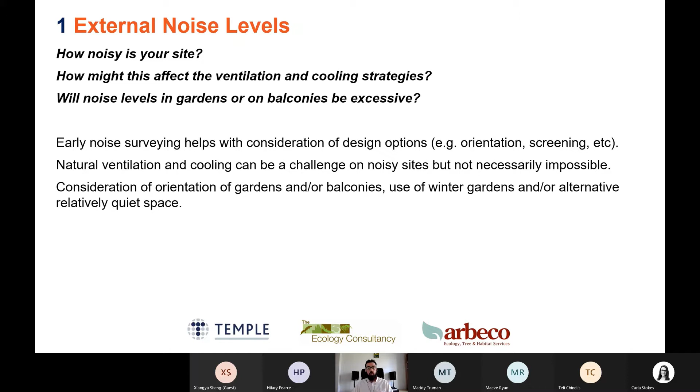On particularly noisy sites, we might look at things like winter gardens on apartments, or an alternative is to find an alternative relatively quiet space. So if we can't achieve the types of noise levels that we'd like to achieve in external amenity space, we could look at a quiet area on the site somewhere else, or a relatively quiet park nearby might be another option.

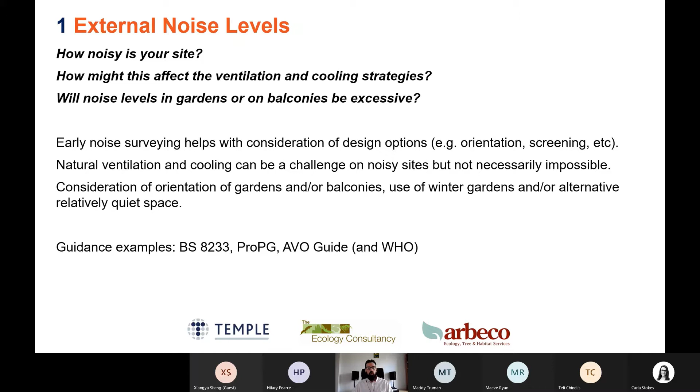So just some guidance examples. BS 8233 gives noise criteria for internal noise levels for things like bedrooms and living rooms, and also gives some guidance on the types of noise levels that we should be expecting in external amenity spaces. ProPG and the AVO guide, which is the acoustics, ventilation and overheating guide, gives some really good advice on those things as well. And a lot of that sort of background information comes from the World Health Organization documents.

So just a quick case study. This was Lefevre Walk, which I worked on back in 2004. So if you can see, this is the A12. Hopefully you can see my cursor there. This is the Lefevre Walk development here. And because this was so noisy, this barrier block was built along the length of the development.

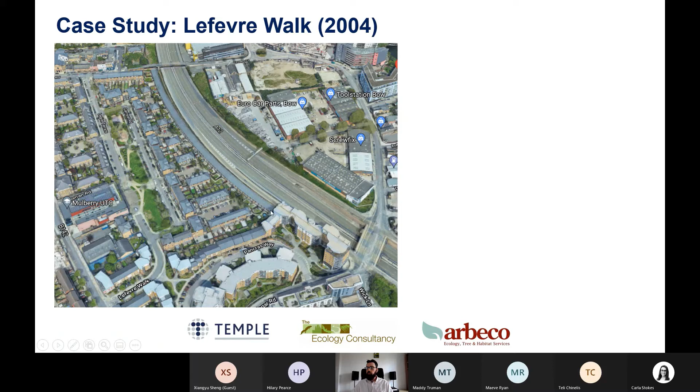If I click through, this shows you the road, this A12 here, and this shows the barrier block built all the way along from the roadside, but also on the development side. So as you'll see, there's some quite small windows here, which were actually deep voided, double glazed windows. And the design was effectively so the noise sensitive rooms were on this side of the building, and on the back were things like bathrooms, kitchens and hallways and stairs, so they didn't need to be quite as quiet.

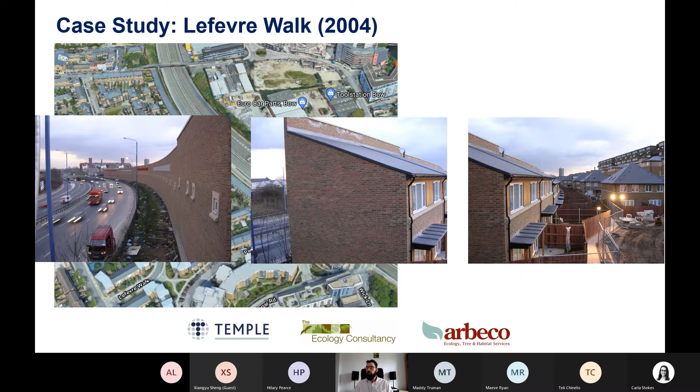And it was before ProPG brought in good acoustic design, but it just strikes me as a pretty good example of good acoustic design where this wall is part of the development, so it isn't an additional cost, but it's screening the rest of the development from the noisy road. And this is how it looks today on Google Maps.

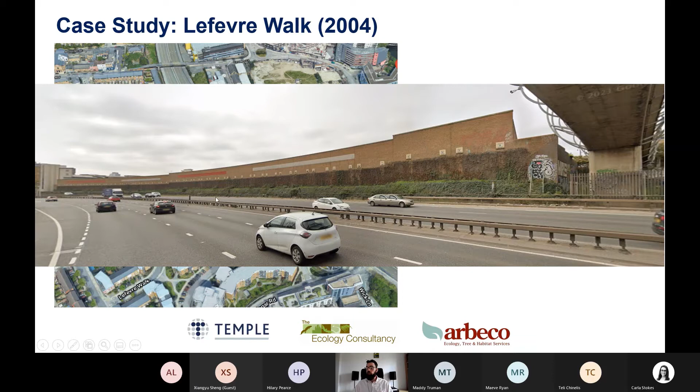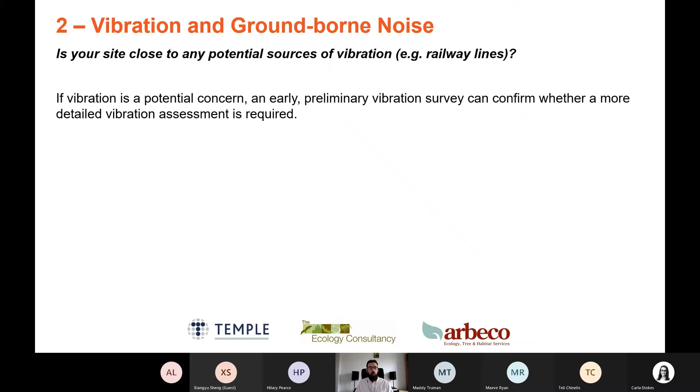Next thing to think about is vibration and ground-borne noise. So is your site close to any potential sources of vibration, such as railway lines? If vibration is a potential concern, an early preliminary vibration survey can confirm whether a more detailed vibration assessment is required, and it can just help to scope that in or scope it out, which is useful.

So next case study is another project I worked on, which is St Pancras Chambers. This is how it looked in 1868. That's not when I worked on it, but I worked on it between 2004 and 2010-11, when it was being refurbished as private residential and a Marriott hotel. Now the main building itself has Thameslink trains running underneath it, which did squeal a bit. I think there used to be a Thameslink curve. I'm not sure if that's been taken out now.

But if you look here, there's a blank space which was filled in with a new bank of hotel rooms, which were actually isolated, and some were even cantilevered across and hung below the isolation itself, which was quite clever stuff. But it just showed that you can reduce the vibration and ground-borne noise levels by isolating parts, either buildings entirely or parts of buildings.

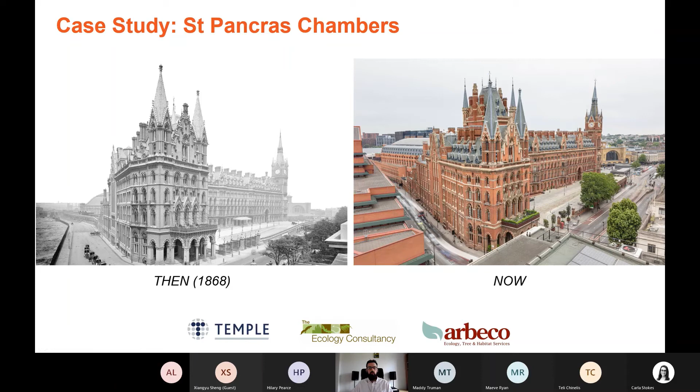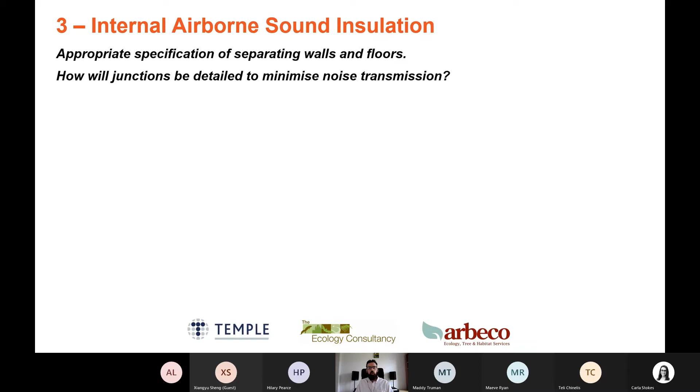Next thing, internal airborne sound insulation. So thinking about the appropriate specification of separating walls and floors, and how will junctions be detailed to minimise noise transmission. So consideration of performance standards that we're going to use, so it might just be building regulations which had its own sound insulation standards for these, or might be enhancements for things like Code for Sustainable Homes, Home Quality Mark or BREEAM, which have all got credits associated with improvements on the building regs.

Consideration of the types of construction that might be used, so it could be masonry or lightweight constructions, or a mix of the two. Whether or not the building is going to be sound insulation tested at the end of the build, or we're going to use robust details. So robust details are effectively a standard set of constructions that have been tested previously, so they know that they pass with flying colours. I tend not to see so many robust details used these days. I think partly because you have to use a full set of robust details, but it's certainly something to consider to avoid the need for sound insulation testing on completion.

Consideration of interactions at junctions, penetrations for services. Bear in mind back-to-back electrical sockets where they're on either side of a partition, so that should be avoided. There are ways that can be treated, but it's best avoided, to be honest. And just thinking around noise from non-residential areas, so commercial space, lifts, plant rooms, those sorts of areas.

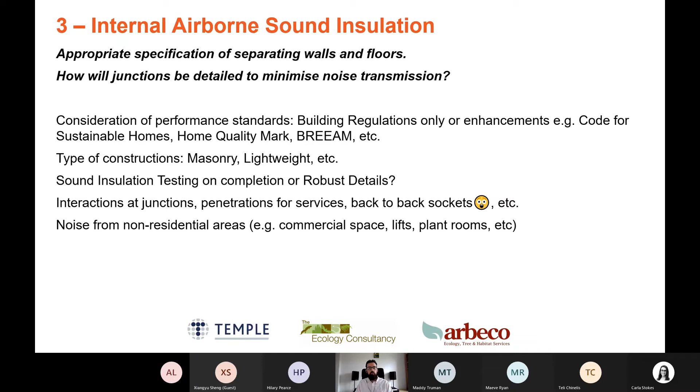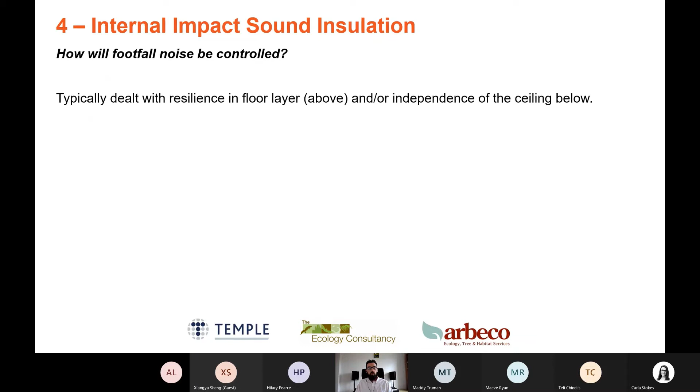Number 4, internal impact sound insulation. So how will footfall noise be controlled? Typically, this will be dealt with by resilience within the floor layer from above, and/or independence of the ceiling below. So this just gives you some examples from Approved Document E, which is part E of the building regs. So floor type 1, I think this has to be an integrated soft floor covering, so it can't be removed as part of a later fit out. I'm not a particular fan of floor type 1. I prefer things like floor type 2 and floor type 3.

So in terms of floor type 2, we've got the resilient layer under a floating layer above this concrete floor, and then the ceiling doesn't have to do as much below. And then we've got a platform floor. So in floor type 3, the ceiling is effectively independent from the floor above. So that's what gives some resilience between the two.

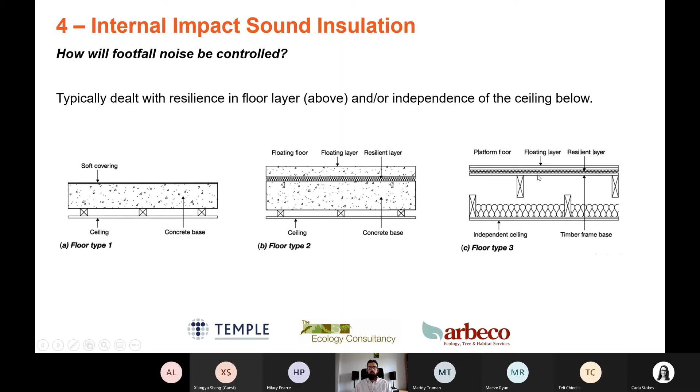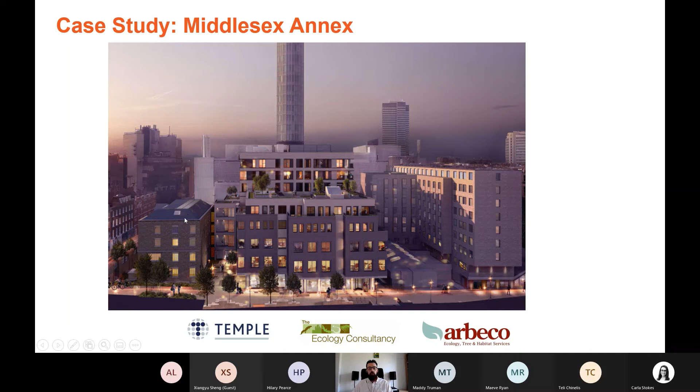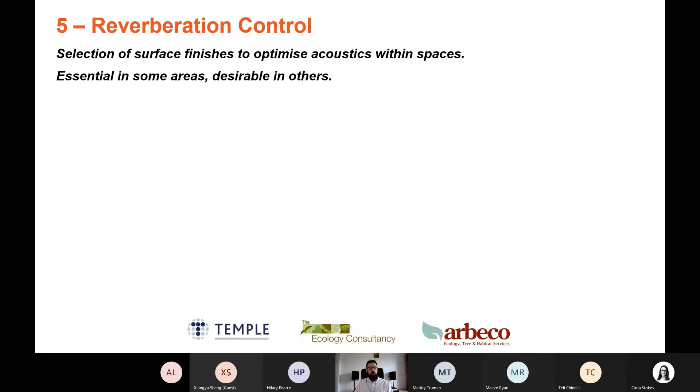So reverberation control is the next thing for us to think about. So consideration of selection of surface finishes to optimize acoustics within spaces. This is essential in some areas and desirable in other areas. So it's essential in communal areas for apartments which are directly accessed from those communal areas. So things like stairwells and entrances where you don't have doors straight off into the apartments, you don't need to control it for those, but it's more corridors and things that are next to the front door of an apartment. And this is typically dealt with an acoustically absorbing ceiling. So things like perforated plasterboard or mineral fibre tiles, those sorts of things.

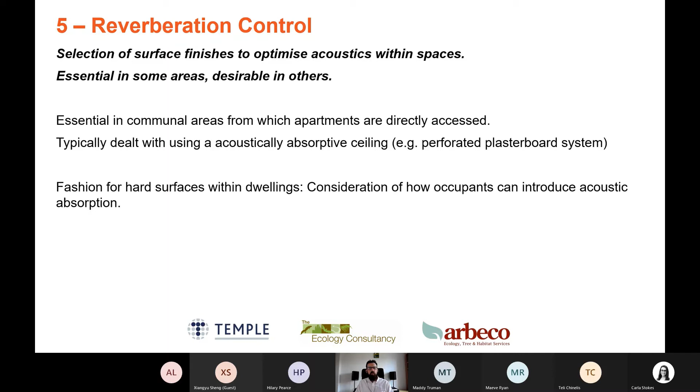There's also a fashion for hard surfaces within dwellings, so consideration of how occupants can introduce acoustic absorption into their own living spaces. I find this room I'm in now doesn't sound too bad to me, but I've heard recordings in the past and it's quite boomy. I've got a hard laminated floor, and I've not really got any soft furnishings around the space. So just consideration of how you can make spaces a bit softer, acoustically softer, I think is useful.

Next one is internal building services noise. So are spaces mechanically ventilated or cooled? If so, how will these systems be controlled for noise? So the first thing to consider is selecting appropriate noise criteria early in the design and communicating that with the design team. And critical is discussion with building services engineers to understand their proposed solutions, the types of systems they're going to use, just to make sure there's that interaction between the two design partners, if you like, of those systems.

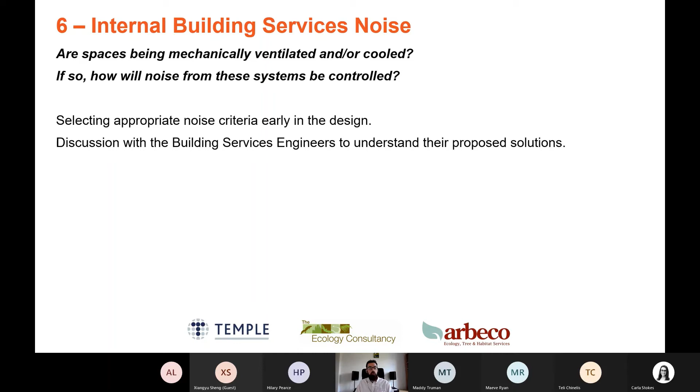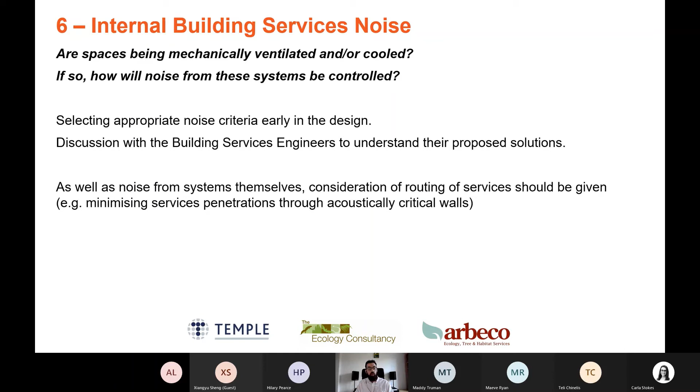As well as noise from the systems themselves, we also need to consider how those systems will be routed. So it's things like minimising ductwork through critical walls, if possible, and it goes back to that earlier point, location of plant rooms, location of lifts. Having lift shafts next to apartments is another acoustic challenge. So if they can be located away from apartments and particularly sensitive spaces within apartments, that can help.

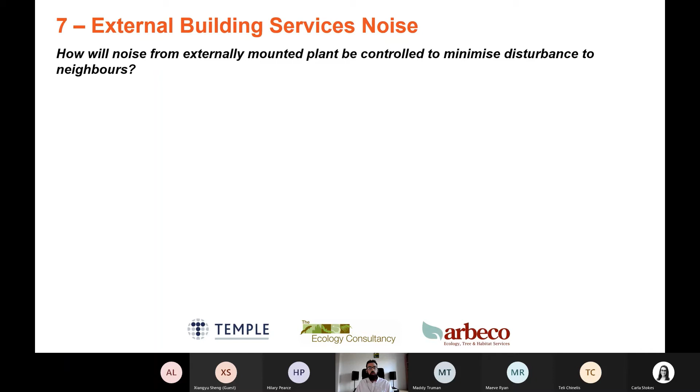And finally, external building services noise. So how will noise from our externally mounted plant be controlled to minimise disturbance to neighbours? This is typically controlled in line with BS 4142 methods for assessing industrial and commercial sound, and it's relative to the existing background noise levels in the area, with allowances for characters such as tonality, impulsivity, and things like that. So the plant rating sound, which takes into account those characters, if it's equal to the existing background sound level in the area at the time, it's considered to be low impact.

But there will be some variation in local authority interpretation of how BS 4142 should be adopted. So it's worth speaking to the local authority early on. As for 6, discussion with building services engineers to understand their proposed solutions, where they're going to have plant, where the nearest noise sensitive neighbours are going to be, is critical to the success of that.

And early noise surveying helps with preliminary plant selections. There's going to need to be a noise survey anyway. So really, the earlier we can get that, the earlier we can sense check. Are we going to have an issue with this? Do we need to look at alternatives? Quieter plant? Do we need to look at mitigations such as attenuation or screening, those sorts of things?

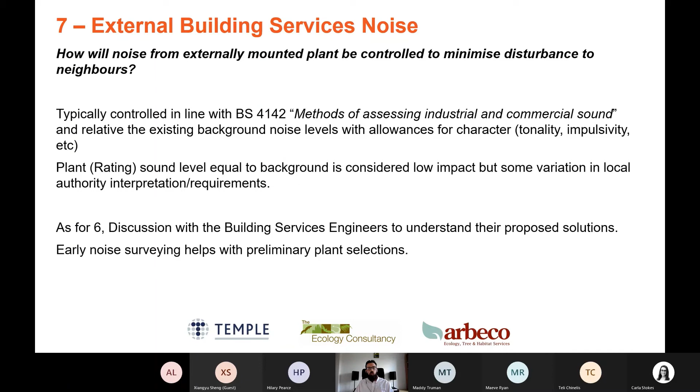And then in summary, I've gone through that a lot quicker than I expected to, so we can go back over anything if we want to. In summary, it's just consideration of things like external noise level, vibration and ground-borne noise, internal airborne sound insulation, internal impact sound insulation, reverberation control, internal building services noise, and external building services noise.

So there's a lot of things to think about, but early acoustic involvement generally leads to better acoustic outcomes and means that we aren't seen as adding cost to projects. If we can get involved early, we can kind of steer things in the right way rather than having to solve problems later on. And noise and vibration don't have to be showstoppers if they're given early consideration. So that was all from me.

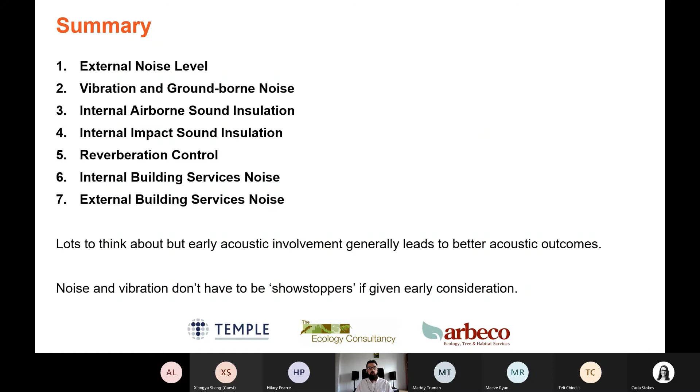I'll ask you a general question. So I mean, this is a rallying call to get acousticians early in the process. You are in a multidisciplinary company, and I don't know if you have a planning department, probably not. But other disciplines in your company get pulled in earlier. What do you think is the reason why acousticians are not brought in at an early stage and only usually at planning when layouts have been decided?

Apart from that great example you gave us with that massive wall. Yeah, that was brilliant. You were brought in really early, but that is very rare. I know you did it back in 2004, but even now, it's really rare. So what do you think is stopping people?

I think it depends. Particularly if it's noisy, so that Lefevre Walk was an example where everybody could recognise early on that noise was going to be an issue, so I think it got brought in then. I think if noise isn't seen as a really big issue, on a lot of sites in London, people won't consider it, it's just like anywhere else, but obviously as standards have increased, we will perhaps get forgotten about a bit.